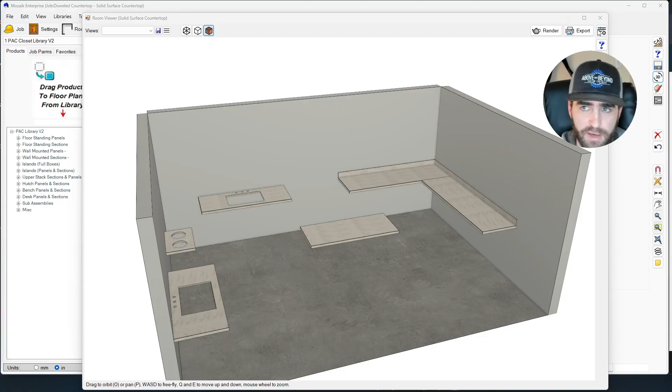All right, so here's a little optimizer run-through for the PAC solid surface Miterfold countertop. I'm going to show you how to bring all these to the optimizer, and we'll just walk through what that looks like. Now, if you've already done the setup with me, then everything is set up correctly, and this is just a refresher for you.

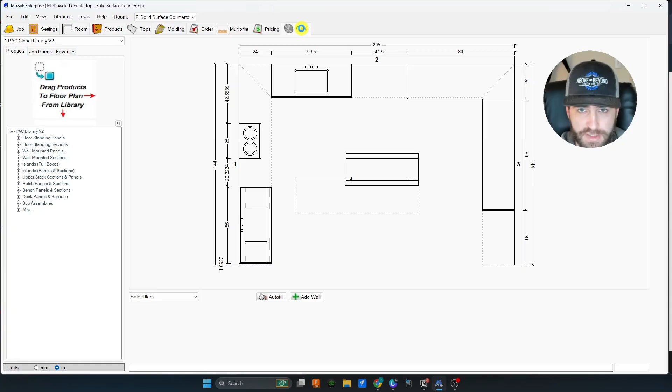If you just bought the product and you're doing a self setup, make sure you watch video one, that's the actual setup. This is just kind of like, all right, now that you have it set up, this is what you do. So you're going to see solid surface buildup and no cut solid surface in your material list. We'll go to optimize. I'm just going to optimize the solid surface.

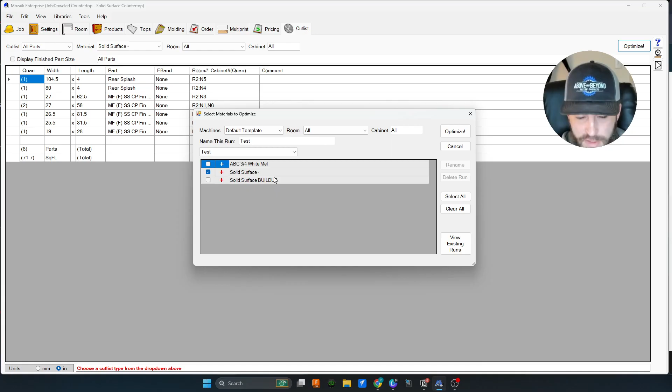The buildup should always be using your regular tools, not your actual. We'll bring that over too. But the buildup uses regular tools like your 3/8 compression because it's going to be plywood. If you're even cutting your buildup at all, maybe you're doing that on a table saw.

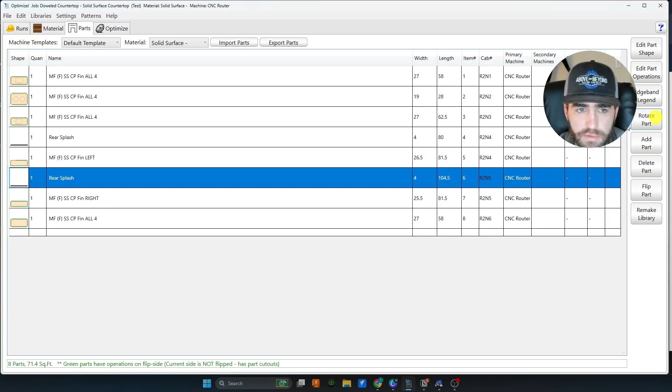So we'll pick the solid surface, go to the parts, may have to rotate your splash, go to optimize and make sure you have the Miterfold solid surface toolset set up that we also go over in the first video, then optimize it.

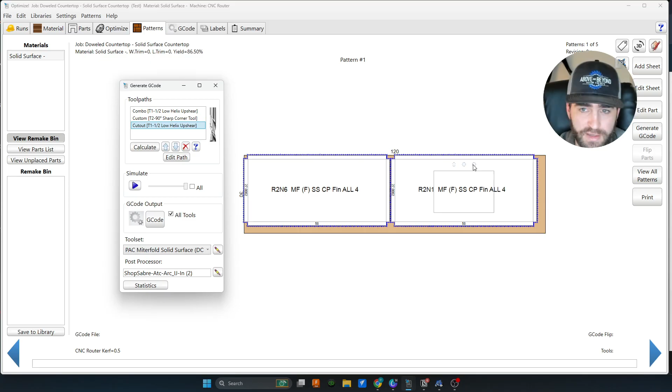Alright, so if we're looking at this first one here, we're going to generate G-code, calculate, get rid of that little warning. Okay, so it's cutting out on the inside of the line for our sink cutout. It's also doing these little pockets for the faucet holes, which is great. If you're like me, it's hard to trust these faucet hole placements unless you're very, very OCD about it. If you need to double check these dimensions, I would highly recommend that.

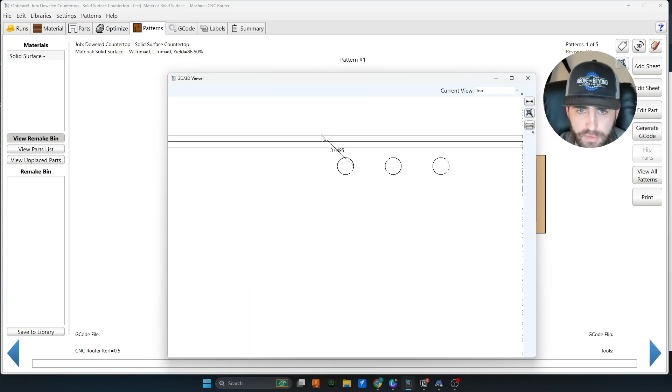We can go to the 3D view. You go into the top view and actually dimension in here, a lesser known feature, but you could dimension from the center, go to the back of the sheet or the back of the miter, whatever you need to do. This is 3.8495 inches from the edge. Okay, that's how we would do our dimensioning.

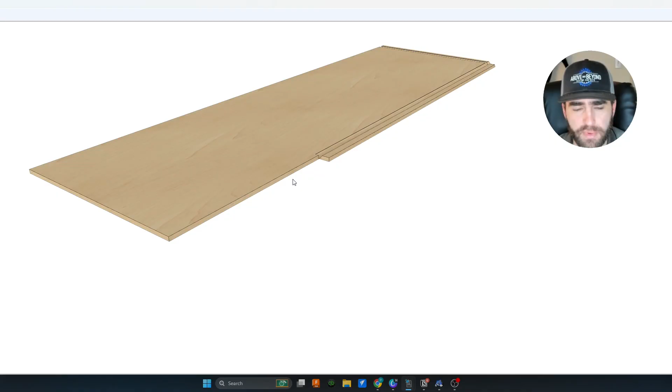Everything looks good there. The other thing you're going to see is that we have these grooves here to make the setup a little easier. This was the actual nosing reduction left and right so that we could get those two 90-degree corner pieces to meet for seaming. So this is all done with a dado. Other than that, there's really not much more to do.

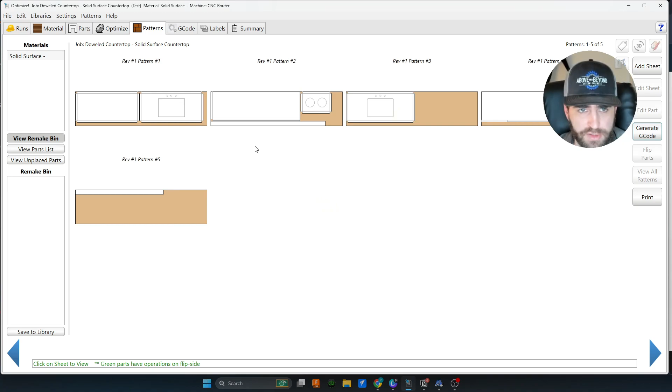Obviously, check over everything, make sure your G-code's looking good, send it to the optimizer with generate G-code, primary sheet program for 5 completed G-codes. If you're still hanging on here, we'll go look at this tool set again. It's in the setup video, but we have a 1/2 inch low helix up shear, 90-degree sharp corner tool.

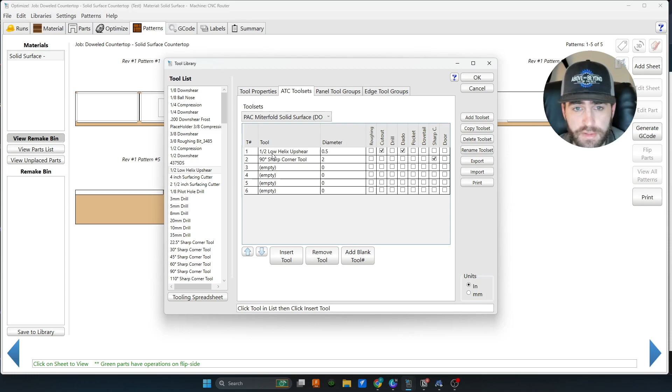Again, please do not use your diamond 90-degree on these miter folds. You'll cook that thing. So get an insert bit, one from Amana or whatever. There's lots of them out there. And we can look at the feed rates again real quick while we're on here. Cut out dado. You could use a 3/8 helical or low helix up shear. Just make sure that you're changing these solid surface tool groups accordingly.

Alright, so this is meant to be a short one. Thank you for watching. A little refresher on how you can do the optimizing for these files.